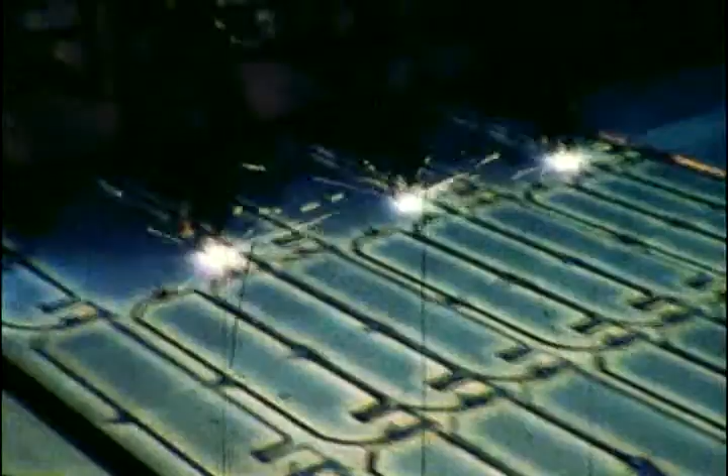Avondale Shipyards Incorporated, New Orleans, Louisiana, has completed a $42 million expansion and modernization program designed to make it one of the most progressive and competitive shipbuilding yards in the world.

Located on the west bank of the Mississippi River, upstream from New Orleans, America's second largest seaport, Avondale was established at the site of the old Southern Pacific Railway ferry, where railway cars were once transported across the river by barges before completion of the Huey P. Long Bridge.

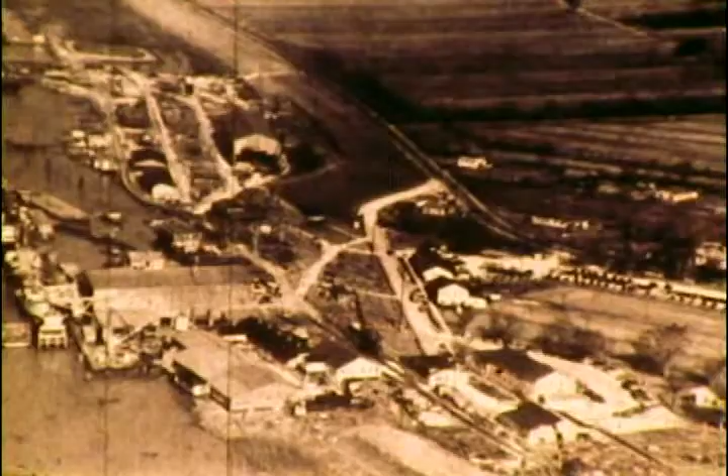Founded in 1938 as a facility to build and repair barges and other river equipment, Avondale made use of the old ferry ramp and rails. Its employees assembled towboats, fishing boats, sugar mill equipment, and components for locks and dams. Those people are now the nucleus of what has become Louisiana's largest industrial workforce.

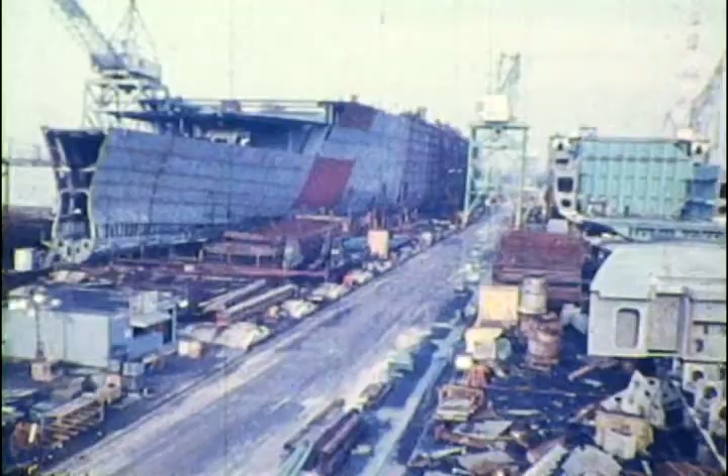Today, Avondale, now a subsidiary of the Ogden Corporation, is a bustling, productive, and dynamic organization which constructs vessels of all types for America's merchant marine, the oil exploration and transportation industries, the United States Navy, and Coast Guard.

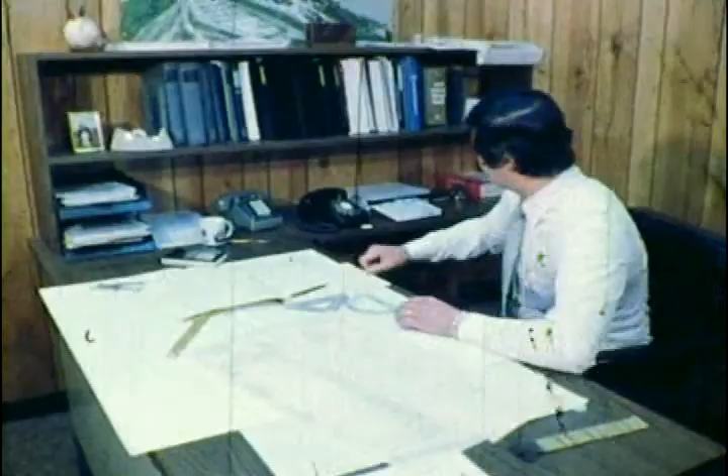Construction of a merchant vessel, a drill rig, or an oil tanker gets its initial start in the marketing department, where a marketing representative provides liaison with the shipyard's customers. The customer's particular marine requirements are researched and analyzed in detail. These requirements then are reviewed by Avondale's naval architects to ensure that the designs will fulfill the customer's particular needs and requirements.

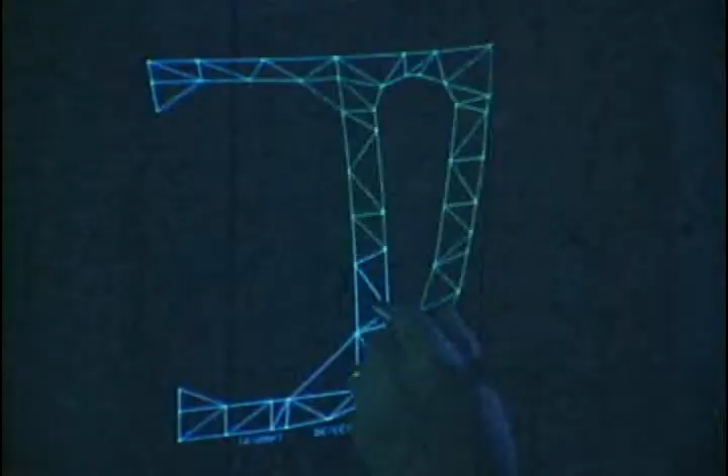Computers are utilized extensively at Avondale as a design tool. Ship designs stored in the computer are displayed on a large cathode ray tube for study and analysis.

Series construction of standardized ships for a single customer or a group of customers is a shipbuilding technique used by Avondale to reduce costs and improve quality. In series production, significant cost advantages are achieved by using the same basic ship design, although many system details can be tailored to meet each customer's requirements.

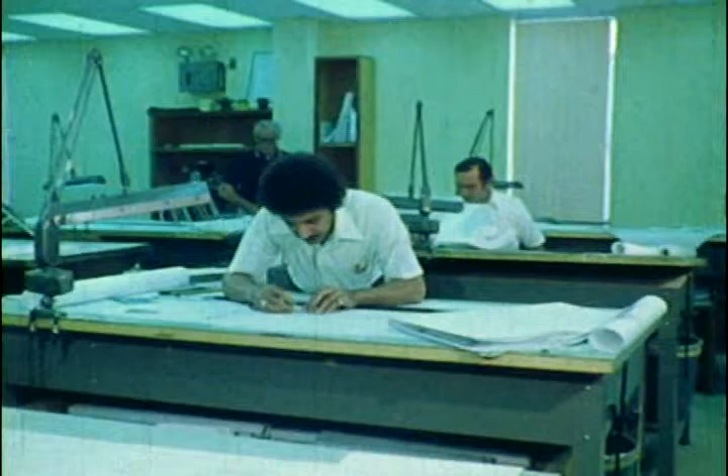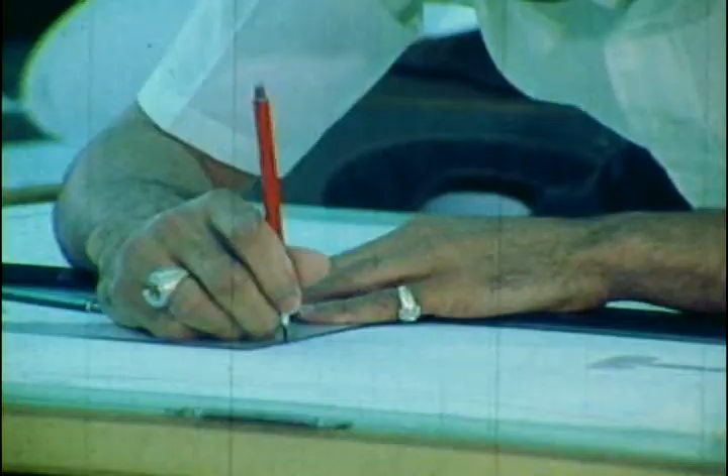A well-balanced engineering team comprising more than 350 engineers, draftsmen, and supporting personnel develops the naval architect's concept into detailed drawings and specifications which are required for actual construction. Close coordination between the production department and engineering assures the timely delivery of workable systems at lower cost.

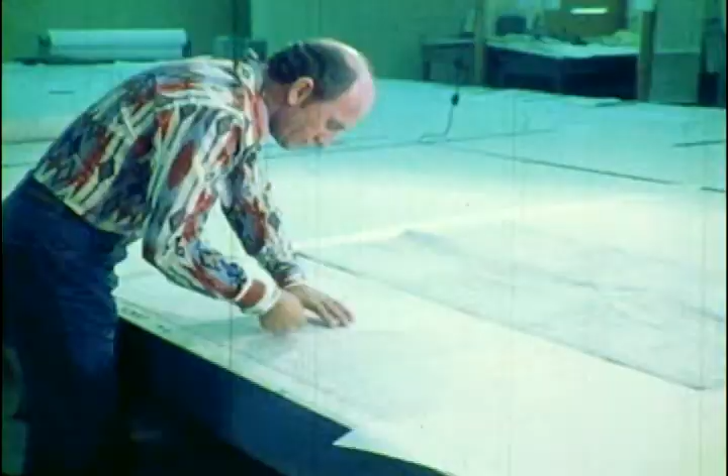From engineering, the drawings flow into the mold loft. This information is compiled and loaded into the ship's database. As the work progresses, the ship's file or computer database is enriched with information. This information is used by the parts coder to create the different pieces used within the ship.

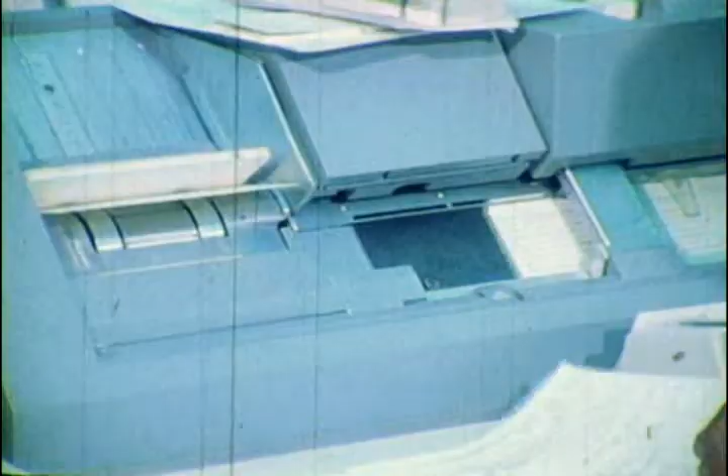The parts coder utilizes this data in the form of a program, which is punched on cards and run through the computer. The output from this program is used by the nesting group to produce the final product for use on the numerically controlled burning machines.

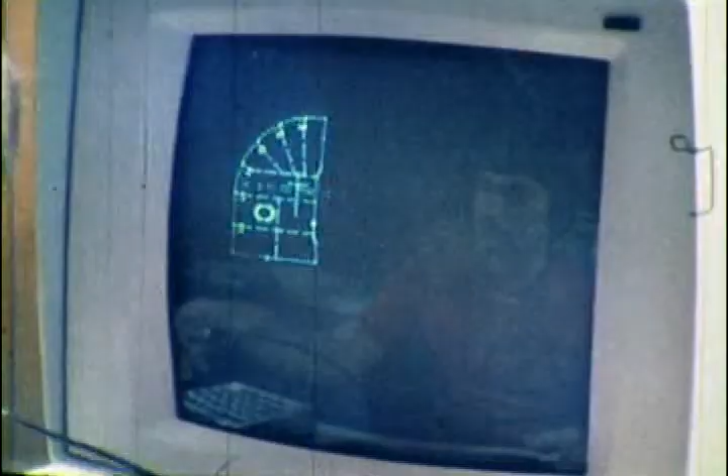Nesting consists of placing the scale parts of the ship on a scale-size representation of a steel plate and manipulating the parts until the least amount of overage or drop-off is obtained. This operation is similar to that performed by a seamstress who groups patterns on a bolt of cloth. This information is coded and the final result is transmitted to the burning machine.

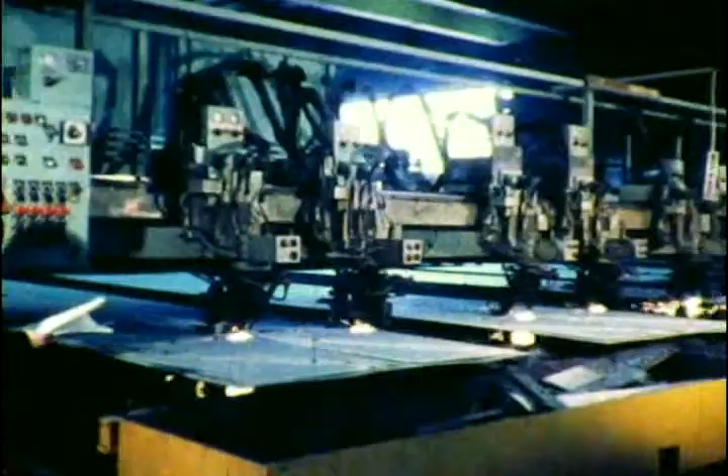Along with the burning information, such data as burning time, processing time, and the amount of scrap material produced is used by the production engineer in writing accurate work orders for the yard.

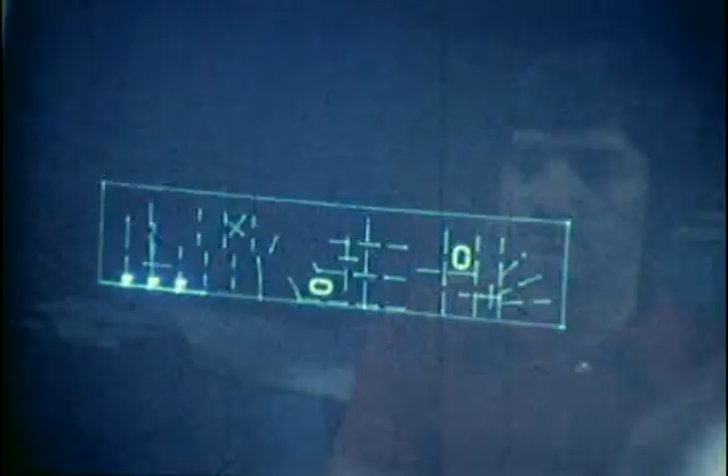A valuable tool in the numerical control process is the cathode ray tube, or CRT display unit. This equipment assures quick and accurate updating of programs written by the coders. Another feature of the CRT units is their ability to check the geometric properties of both parts and nesting programs.

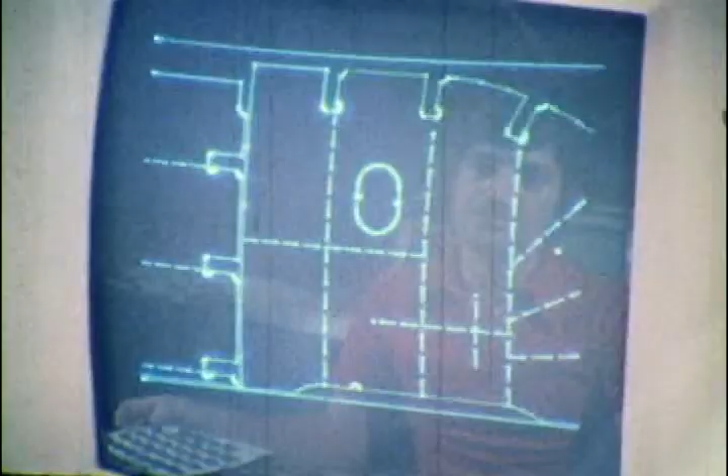Computer programs are checked and rechecked on the cathode ray tube display to be sure that the nesting drawings are correct. The drawing serves as a record of the final nested parts and as a guide for operators in setting up the numerically controlled burning machines to cut the plates. The operator uses a light pen to change the drawings on the display tube.

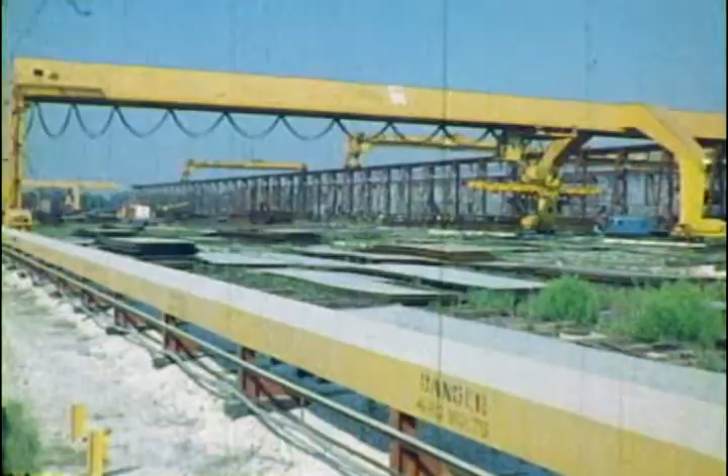Steel, the primary ingredient of shipbuilding, arrives either by truck, barge, or rail at the yard, where it is unloaded, identified, and placed in the vast steel storage area until required. The 14-acre steel storage area is spanned by two large 15-ton magnetic cranes, which are used for transporting the heavy plates.

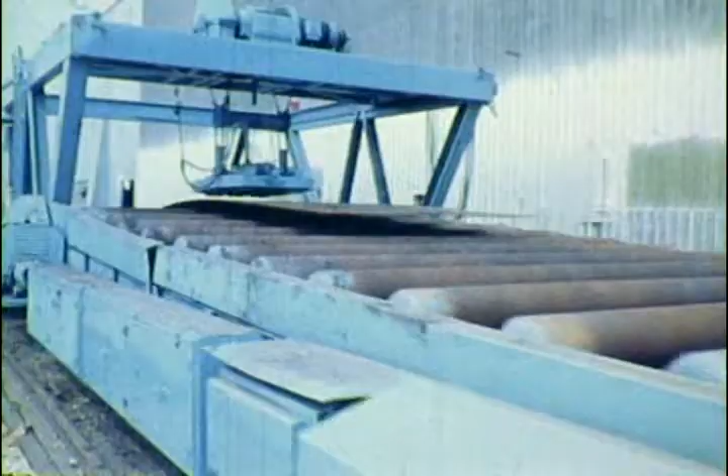Programmed plates are lifted from the various storage stacks by the cranes and moved to an input conveyor line for the rotoblast machines. From here, all operations are completely automatic until the plates are moved into the plate shop to await the numerically controlled burning.

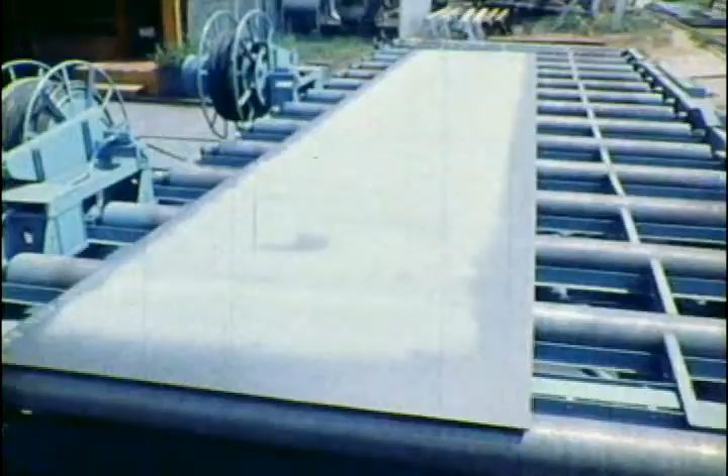This automatic operation consists of a collocator which picks up the plates and transports them to the rotoblasting machines for blasting and then automatic surface coating. From here, a collocator transfers the plates to the shop floor to await the automatic burning machines.

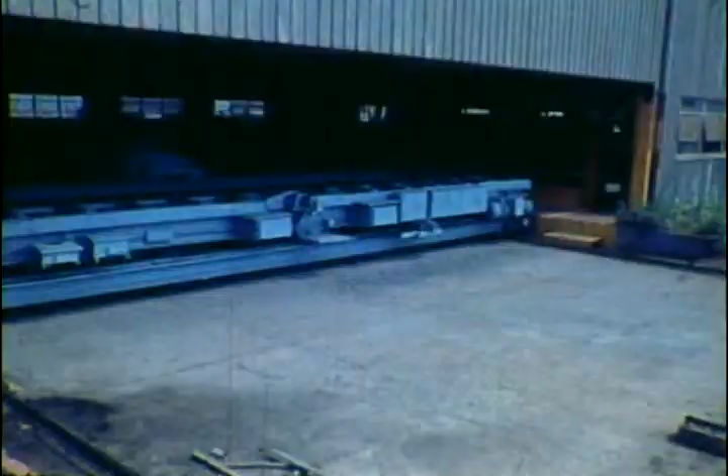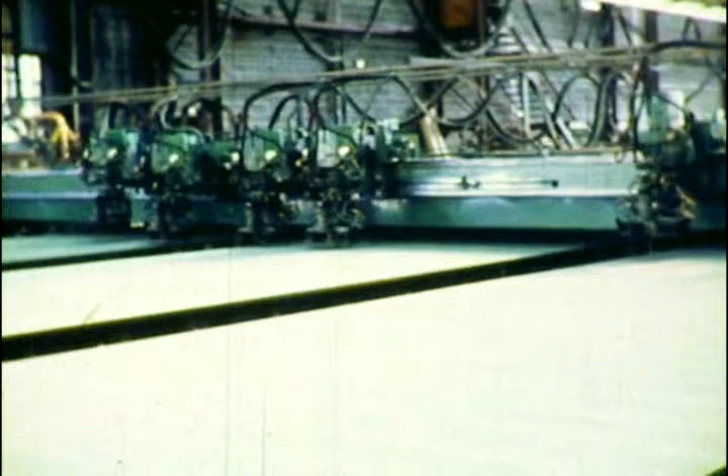With its primer coat of paint already applied and dried, the steel plate moves on to the automatic burning and cutting operation. Reference marks are applied to the steel for later addition of structural members. All raw material is handled on and off the burning track by overhead magnetic cranes.

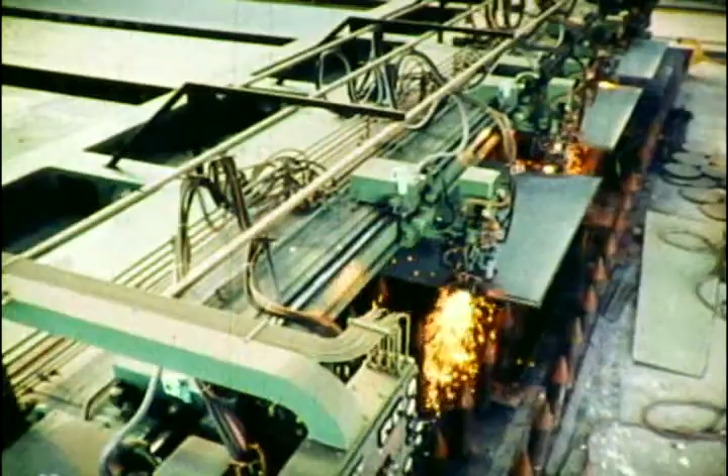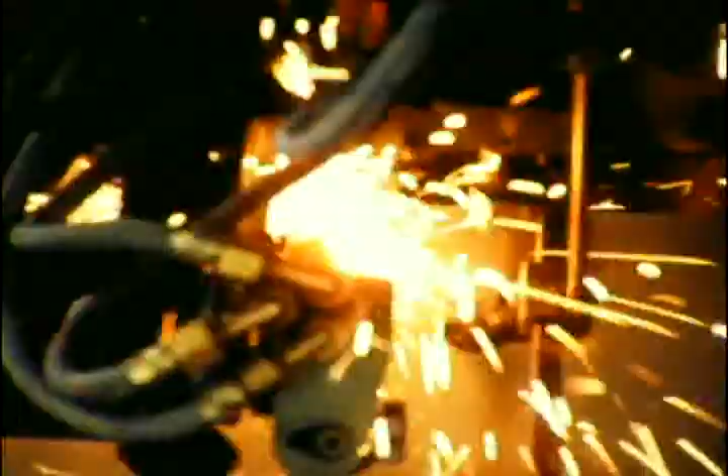Avondale has 4 numerically controlled burning machines, 2 two-axis machines, which are used for square edge burning of shaped ship parts, and 2 three-axis machines, which are capable of beveling plate edges to facilitate welding of joints and fabrication. The 4 burning machines, which can process 1,330 tons of steel in a week, are driven directly from the computer.

The numerically controlled burning equipment center punches stiffener locations, waterline frames, and so forth at a rate of 280 inches per minute and burns 1-inch thick steel plates at 18 inches per minute. After the plates are burned, the operator labels the parts with identification numbers to accommodate the use of the steel parts throughout ship construction.

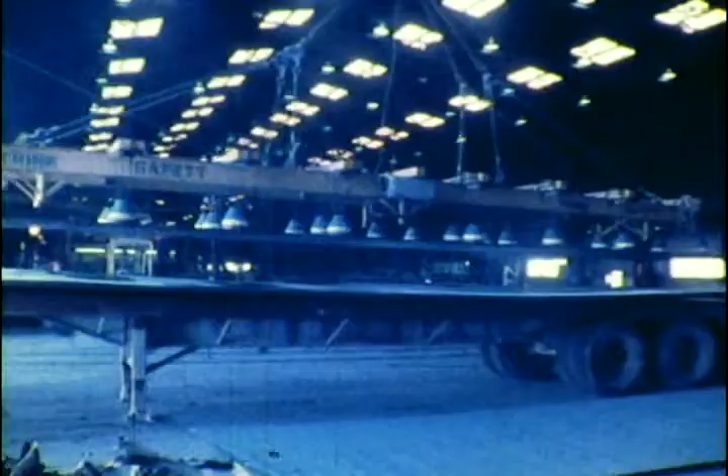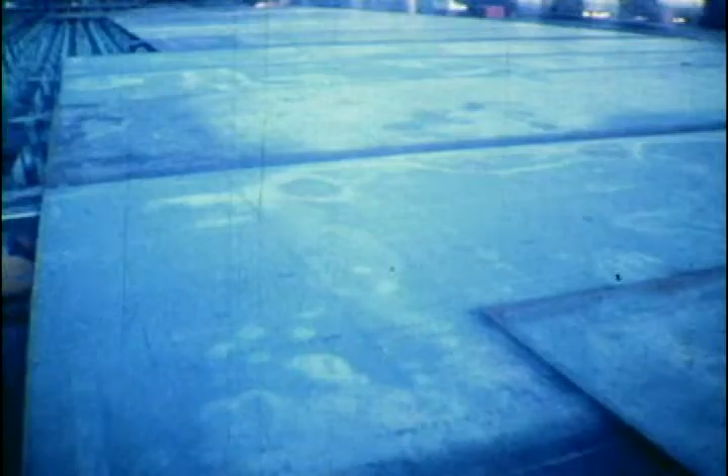Steel plates are loaded onto the panel line by another magnetic crane. Each plate is hydraulically positioned and then tack welded by a semi-automatic welding machine. Plates are added in this manner one at a time up to the size needed for the desired panel. When the ship design requires stiffeners, these are automatically moved into position and tack welded to the plate.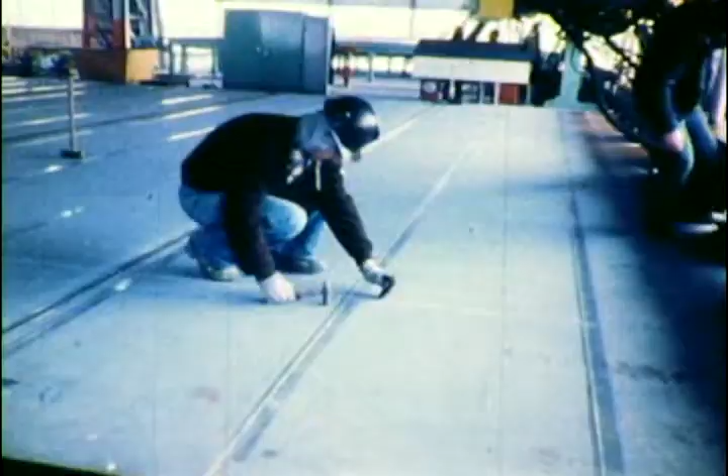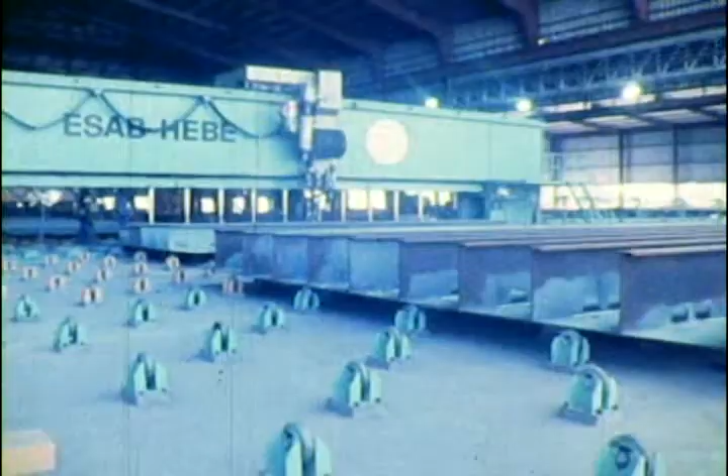An automatic welder simultaneously applies fillet welds to both sides of the stiffener. After the welding process, the stiffened section of the vessel's bulkhead is complete. The panel section then moves to the final station, where it's lifted off the line and transported to the hull assembly area.

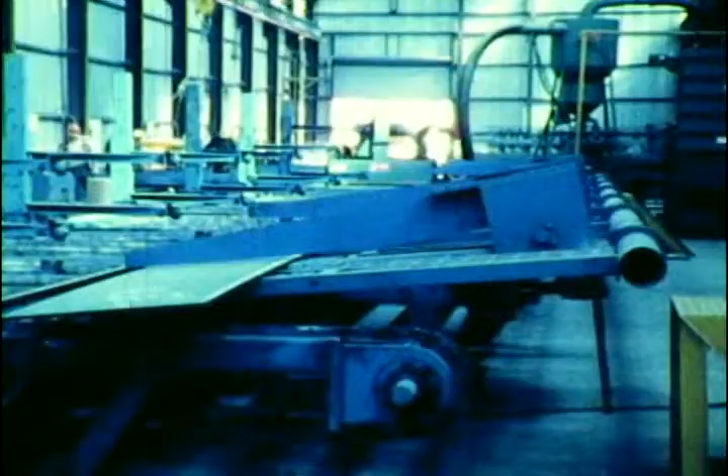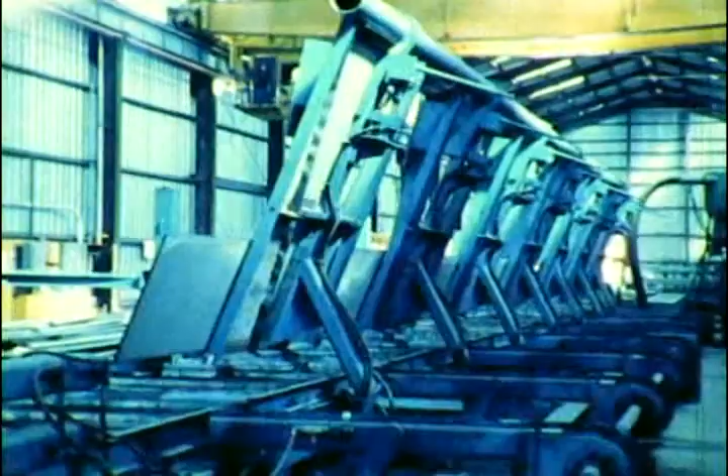One of the many new installations at Avondale's main yard is the T-beam shop, a 420-foot-long building which houses the T-beam fabrication unit and related equipment for the preparation of the steel components. One of the most modern T-beam fabricating machines in the United States, this unit is capable of automatically fabricating 60-foot-long T-beams, structural components that are used extensively in the construction of certain vessels.

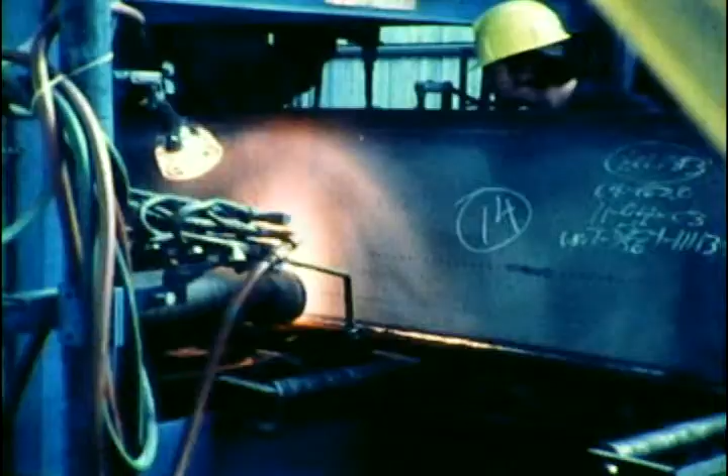Initially, all surfaces which are to be welded are shot blasted. Then the 2 plates, which will form the T-beam, are fed simultaneously through an automatic welding machine with a double welding head. Behind the automatic welder, the complete beam is automatically pre-shrunk so that it will be perfectly straight after it cools. T-beams as long as 60 feet have been completed in only 15 minutes with this new equipment.

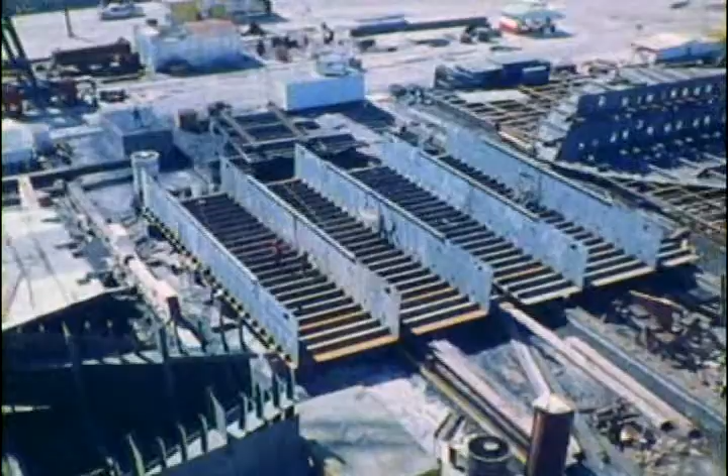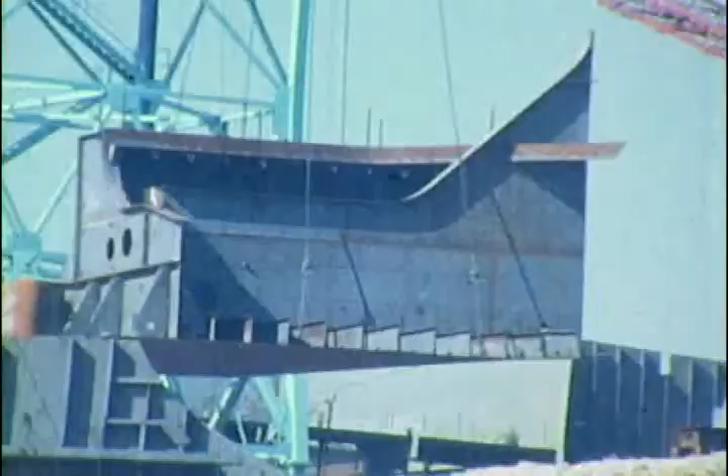One of the 4 oil tankers which Avondale is building for the Standard Oil Company of Ohio dominates this overall view of the hull assembly area. Sub-assemblies and components fabricated in the T-beam shop, on the panel line, and in the machine and pipe shops are positioned and installed or welded in the hull of this vessel, which when completed will measure more than 900 feet long and 173 feet wide.

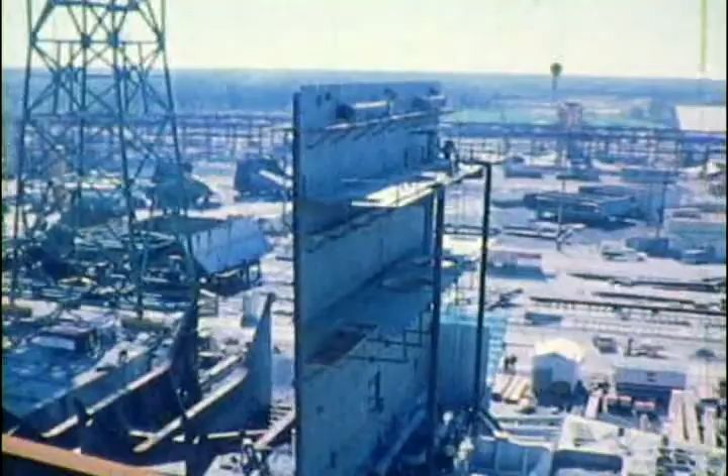Weighing some 23,000 long tons empty, it will be able to haul 1.2 million barrels, or 50 million gallons of petroleum products across the oceans of the world.

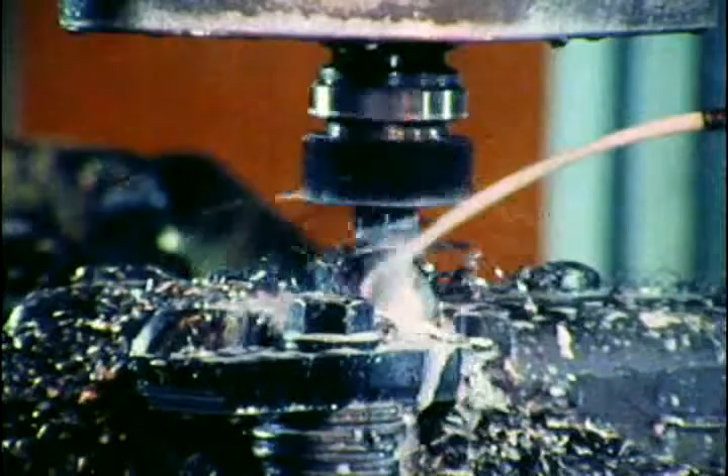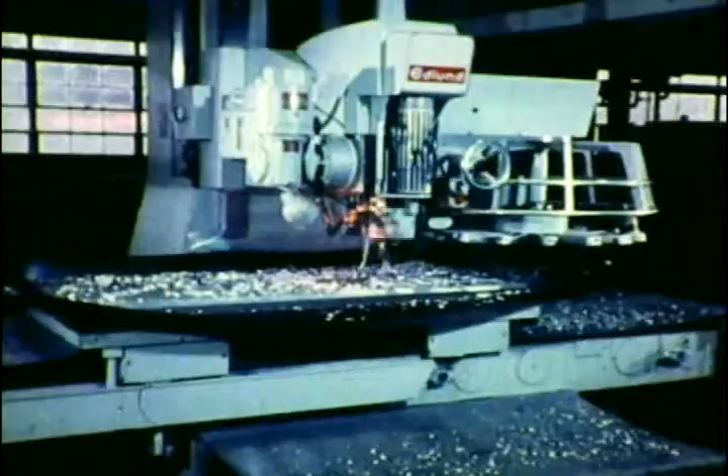Here in Avondale's modern machine shop, fully automated, numerically controlled machinery produces many intricate parts and assemblies essential to ship construction. This vertical boring mill, for example, which is directed by a punched tape, can perform 18 different functions. It selects the appropriate tool for the task at hand and automatically bores or cuts out the part with precision and efficiency. The operator simply places the metal plate on the machine and the punched tape in the control unit, then presses the button.

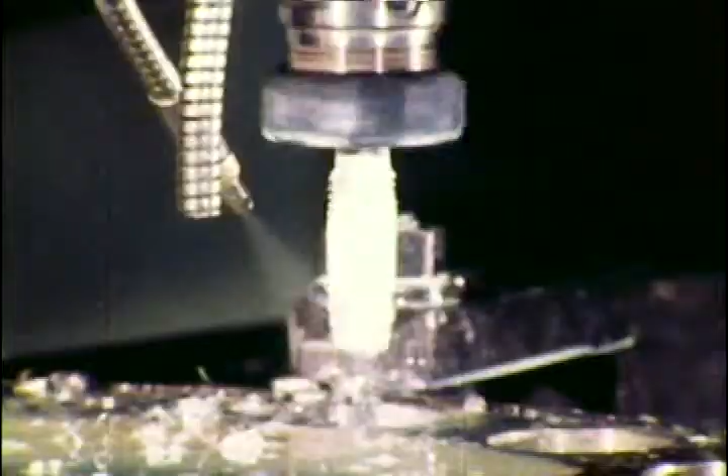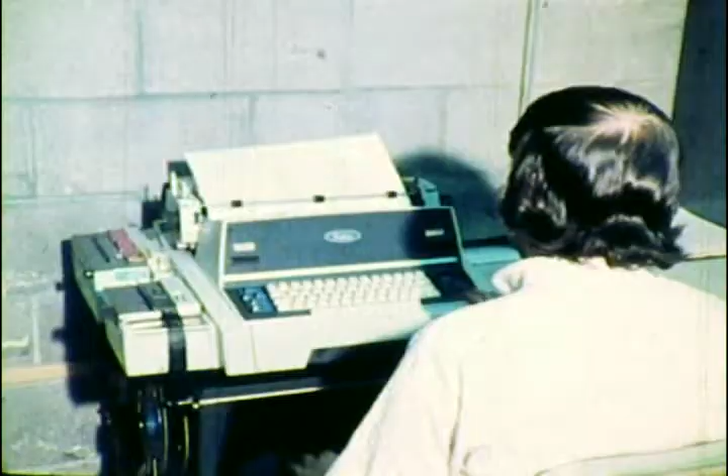Propellers, such as this one, 28 feet in diameter, are bored by a tape-controlled machine. The boring operations, which formerly took 2 or 3 weeks before the installation of this new machinery, are now accomplished in 24 hours or less.

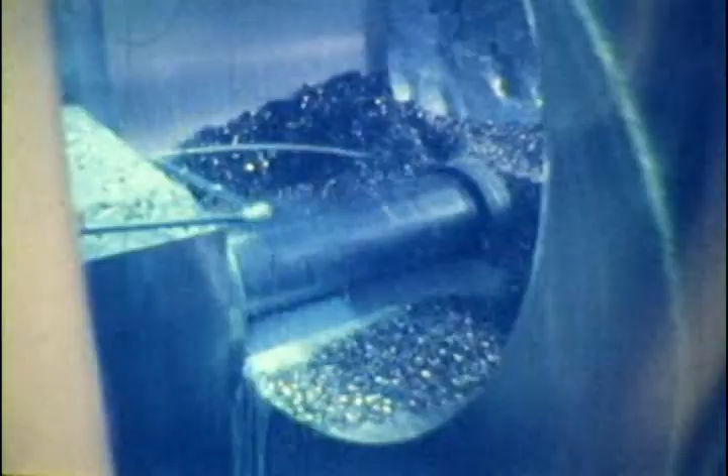The innovative Avondale people also are looking into new, cost-effective ways of making ship propellers. This propeller was cast in the foundry and hand-finished, but Avondale has patented and now is developing a machine which will be capable of cutting and shaping propellers from a solid metal block, or automatically finishing a rough casting.

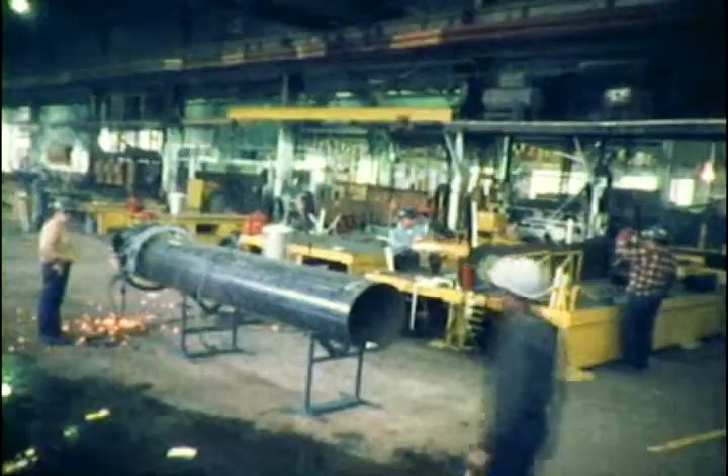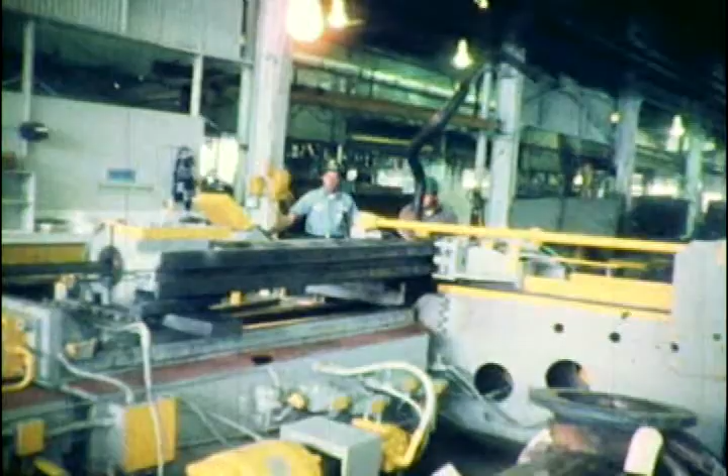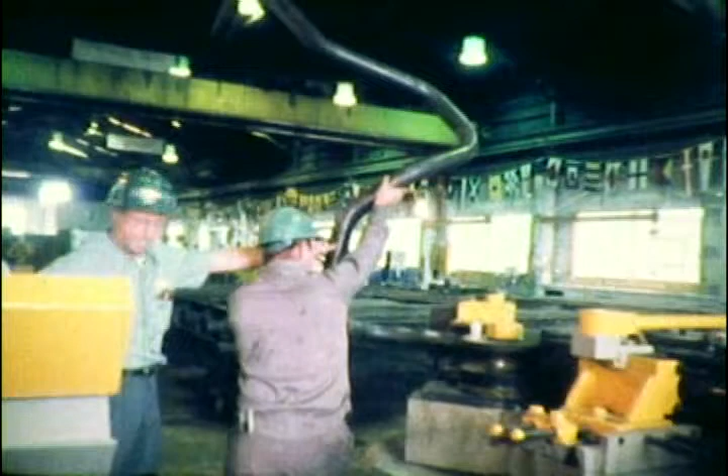Piping of various diameters, lengths, and shapes to satisfy virtually every shipyard requirement, as well as meet the needs of the petroleum, chemical, and marine industries, is fabricated in Avondale's pipe shop. This 150 by 300-foot facility is equipped to handle any type of pipe fabrication in steel, steel alloys, stainless steel, copper, aluminum, or PVC plastic.

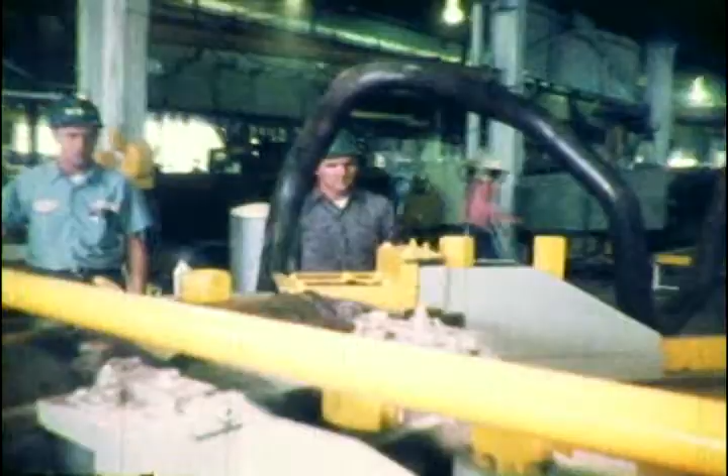The pipes are cut, bent, welded, and assembled to exacting standards, and then stored on pallets outside. From here, they flow in a steady stream to the various job sites.

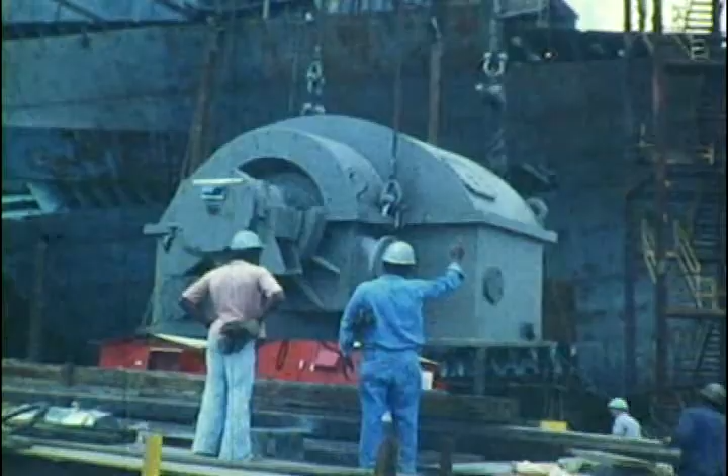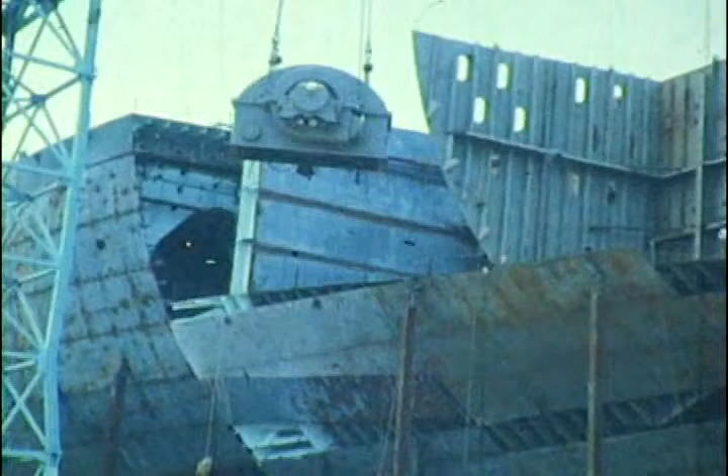Advanced pre-outfitting techniques are utilized by Avondale to install major subsystems and large pieces of equipment such as this reduction gear assembly or machinery foundations, pumps, valves, and piping as the structural sections of the ship are being put together. Note the openings in this bulkhead, which have been pre-cut to accommodate large pipe sections that have been fabricated in the pipe shop.

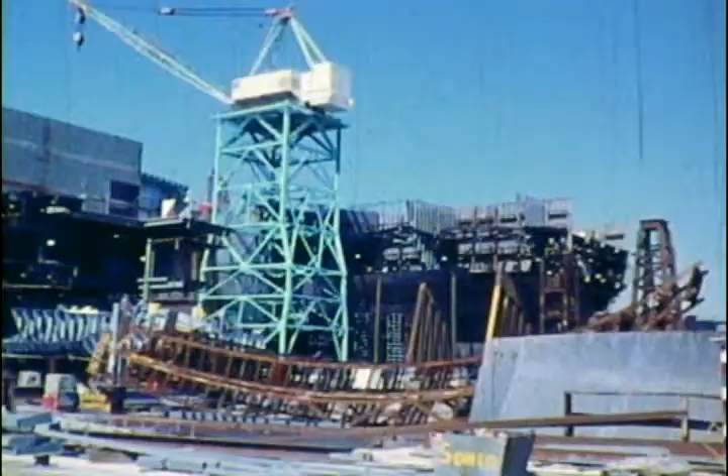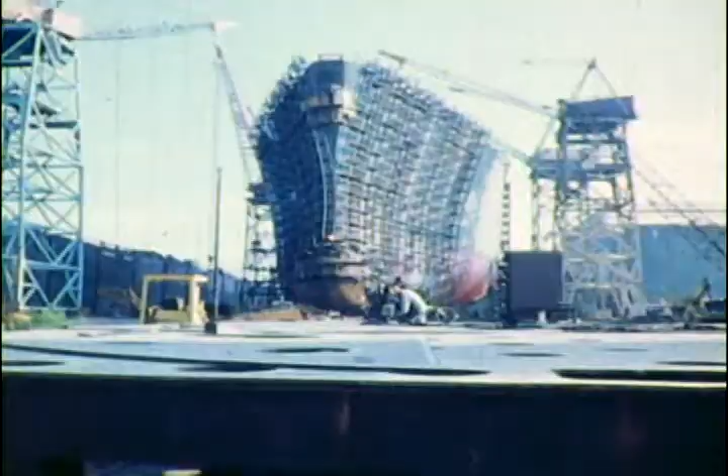Among the largest and technically complex vessels ever constructed in an American shipyard are the 3 LNG carriers, which Avondale is building under contracts with the El Paso Natural Gas Company. Each of these ships, which are more than 932 feet long with a beam of 141 feet, will be used to transport 125,000 cubic meters of liquefied natural gas, LNG as they call it, on a large scale from areas which have an abundance of natural gas across the seas to those places which need it, such as from the Middle East to the United States, or from Alaska to the lower 48 states, or even to Japan.

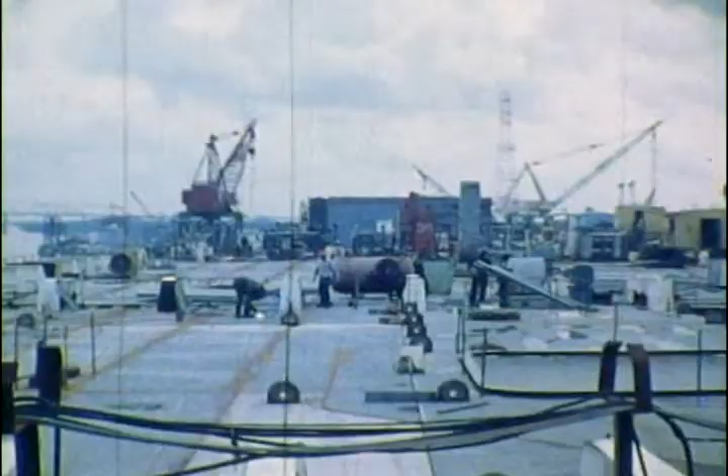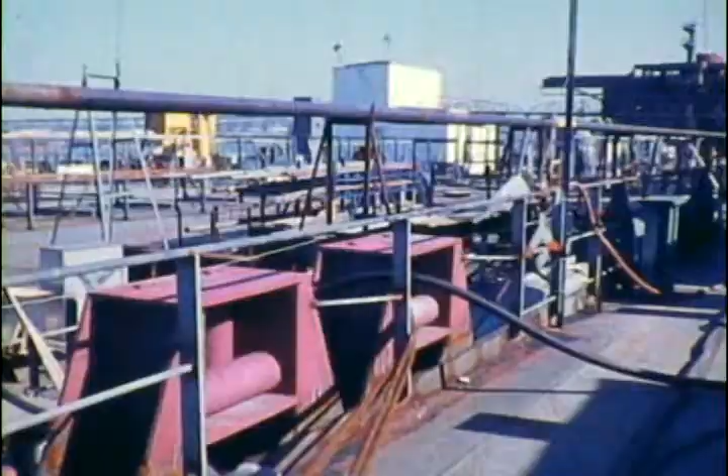Natural gas becomes liquefied and significantly condensed in volume when it is supercooled to a temperature of minus 259 degrees Fahrenheit. At that temperature, it becomes a liquid with 1/600th of the volume of the gas. Thus, much more natural gas can be transported in liquid form in the 5 cryogenic or super cold tanks of the LNG carriers. As an indication of the size of these insulated tanks, Avondale engineers have calculated that it would take an ordinary garden hose running 24 hours a day at least 2.5 years to fill just one of these gigantic tanks. Another statistic of interest, the gas in liquid form carried by one of these 125,000 cubic meter tankers would cover a regulation football field to a depth of more than 100 feet.

From the building ways, where the hull was assembled, the huge LNG carrier, now weighing more than 27,000 tons, is moved in stages to the dry dock floating in the Mississippi River. Powerful hydraulic rams are used to shove the hull sideways along the building ways and onto the dry dock.

Another new major installation at Avondale is the enormous multi-purpose dry dock which floats in the Mississippi River adjacent to the main yard. The largest one of its type in the world, the Avondale dry dock is more than 900 feet long, longer than 3 football fields, and 260 feet wide. It has a lifting capacity of more than 80,000 tons and is shown here containing a barge, oil rig, and a tugboat on the same lift.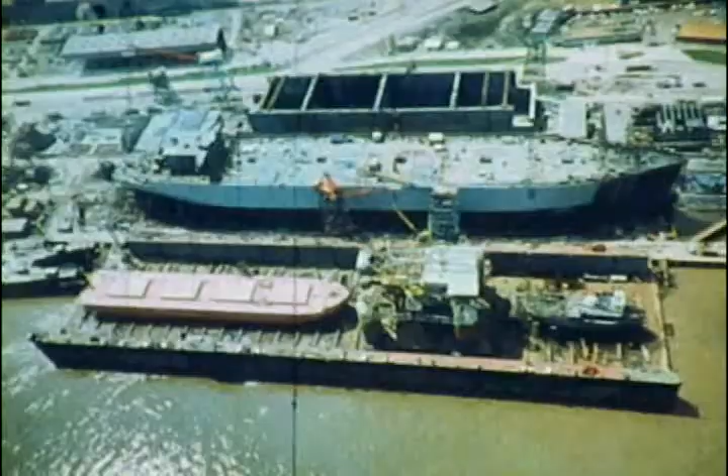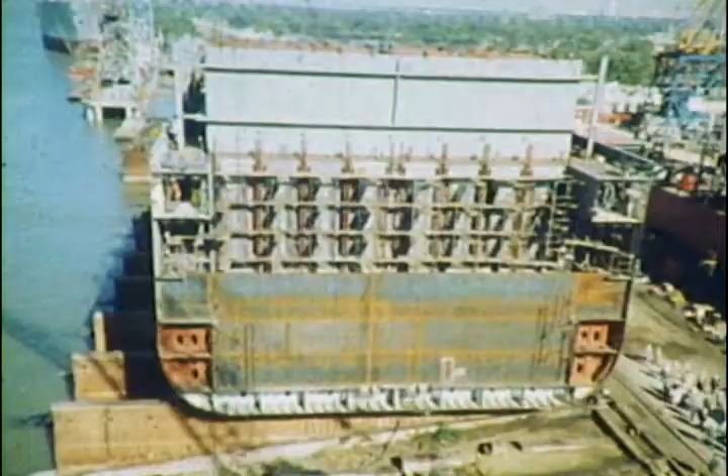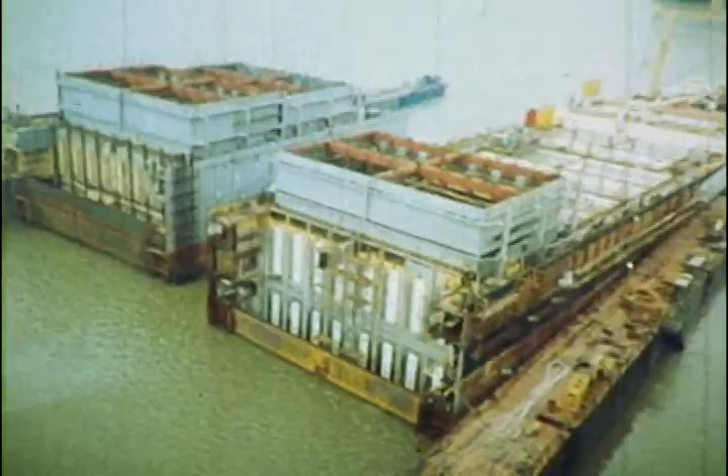One of the first uses of the dry dock, completed in 1975, was for the installation of a 140-foot-long mid-body refrigerated section to a 669-foot Farrell Lines container ship, the Austral Entente. The mid-body section was side-launched into the river and then placed between the bow and stern sections of the Austral Entente in the dry dock. The new floating dry dock has practically eliminated the spectacular side launches of ships into the Mississippi River.

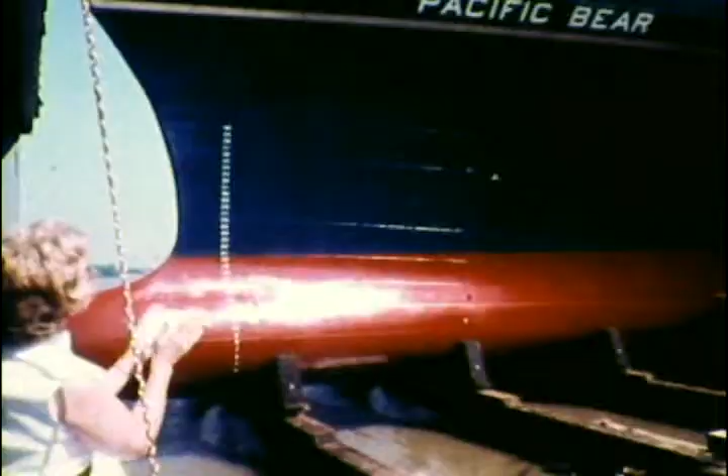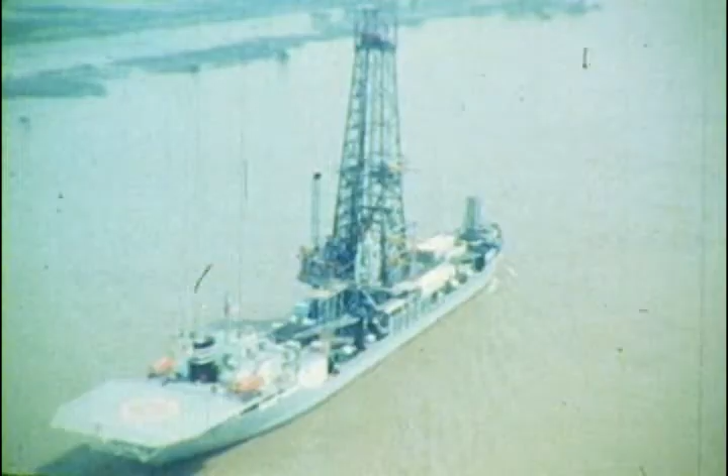During the late 1960s and early 1970s, Avondale delivered a total of 80 ships of all types. Some of them, shown here during launches or undergoing trials, are a high-endurance U.S. Coast Guard cutter, one of 12 built here. Oil tankers. U.S. Navy destroyer escort, one of 27 built for the Naval Sea Systems Command. LASH cargo ships, 20 of which were built for Prudential Lines, Pacific Far East Lines, and the Delta, Waterman, and Central Gulf Steamship Corporations. Drill ships for offshore oil exploration. And now, the largest of them all, the El Paso LNG carrier, being launched by the new floating dry dock.

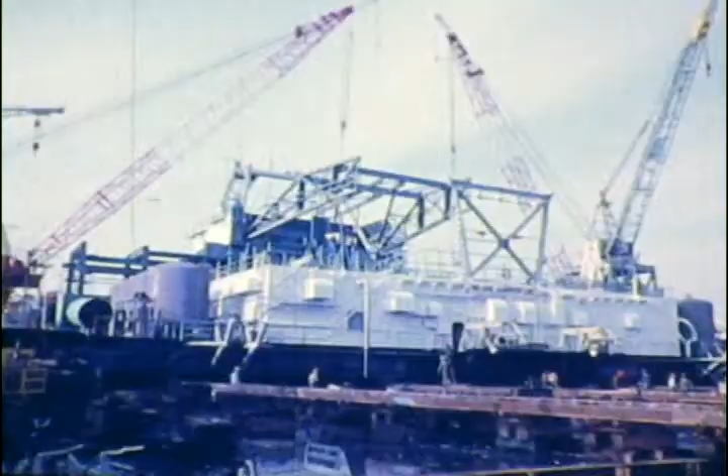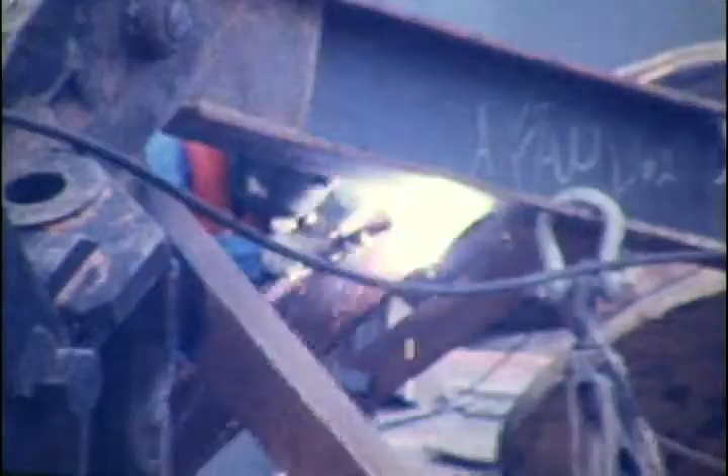Avondale began pioneering the construction of drilling rigs and ships for the offshore oil industry in 1948. The rigs built in the early years of offshore exploration were primarily for use in the Gulf of Mexico, off the coasts of Louisiana and Texas. But today, Avondale-built rigs are operating around the world in search of new oil and gas fields.

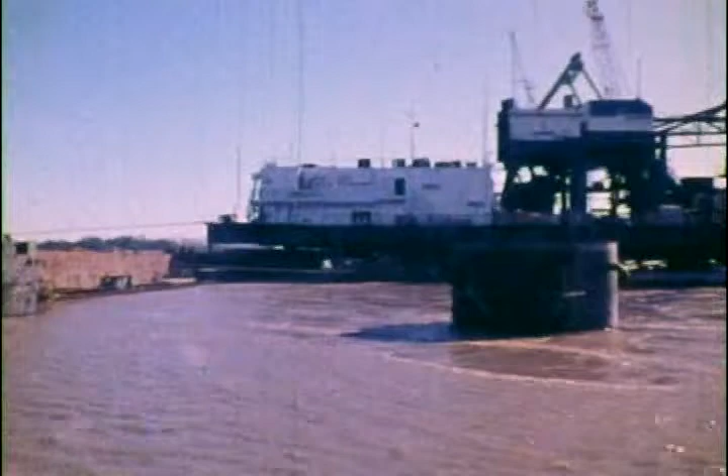This Sedco semi-submersible drilling rig was partially constructed at the main yard, so tall that a completed drilling platform would be unable to pass under the bridges over the Mississippi. The pontoon and stabilization columns, those sections which extend below the water, and the deck house are then floated downriver to the final assembly site at Belle Chasse, a few miles below New Orleans. Here, the deck section is added, and outfitting of the crew living accommodations, drilling machinery, and other systems takes place. Upon completion of this work, the rig moves down the Mississippi and out into the Gulf of Mexico for sea trials.

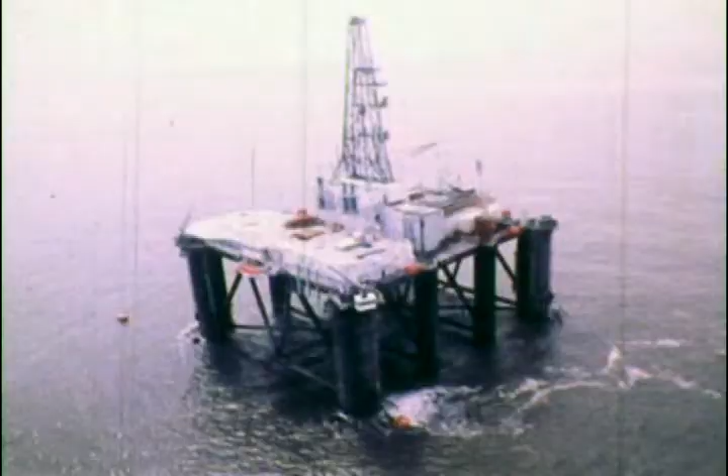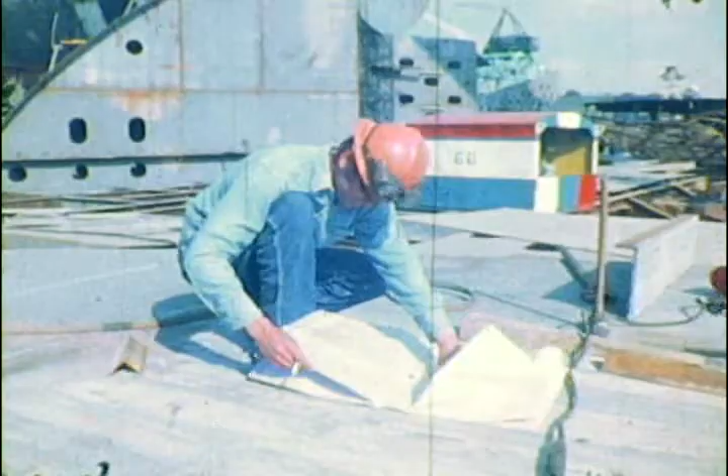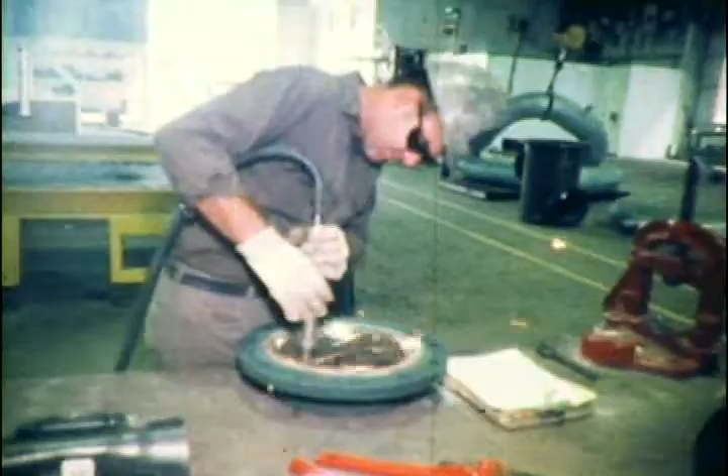Avondale's accomplishments over the years and its future growth have been made possible by its people. More than 8,000 of them: welders, computer operators, ship fitters, foremen, engineers, draftsmen, and many others whose skills and talents are dedicated to the production of reliable products on schedule, utilizing the most efficient shipbuilding techniques available.